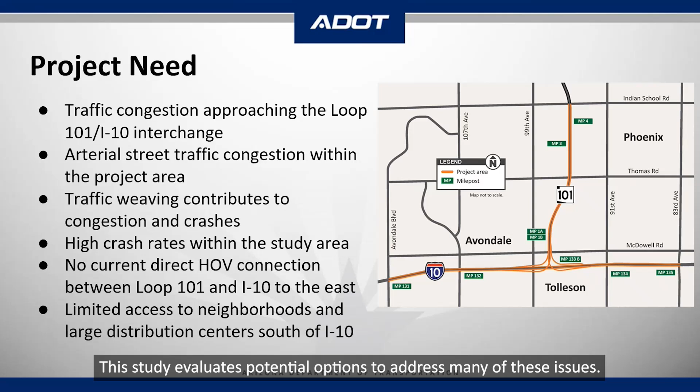Finally, there are several large distribution centers located south of I-10, which generate heavy truck movements, with limited options for access to the freeways and many conflicting movements with vehicles. This study evaluates potential options to address many of these issues.

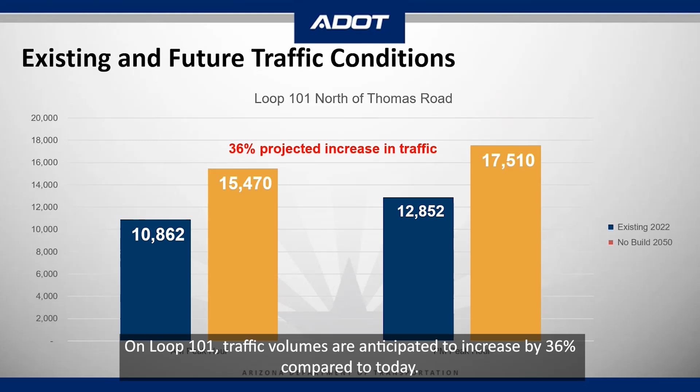With additional growth in the West Valley, it is anticipated that traffic levels will continue to increase, which would further increase congestion on I-10, Loop 101, and the surrounding areas. The study team is evaluating both the existing traffic conditions and the future traffic conditions up to the year 2050 within the study area. On Loop 101, traffic volumes are anticipated to increase by 36% compared to today.

On I-10, traffic volumes are anticipated to increase by 19% compared to today. These increases in traffic volumes during the peak travel periods will contribute to increased congestion on both Loop 101 and I-10.

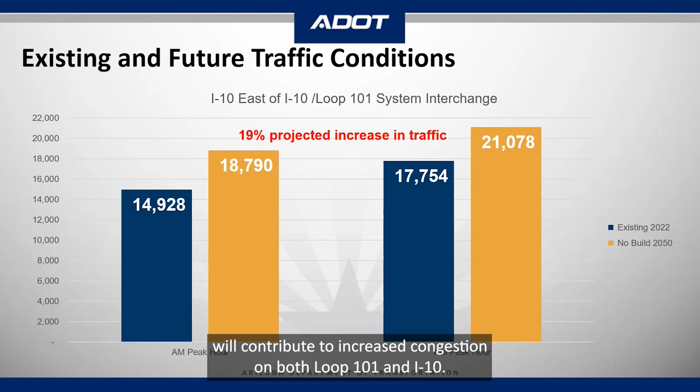The project area is currently experiencing moderate to high levels of congestion during the morning commute. The areas shown in red indicate high levels of congestion, and yellow indicates moderate congestion. Although some of the intersections show overall moderate levels of congestion, there are many movements experiencing high congestion.

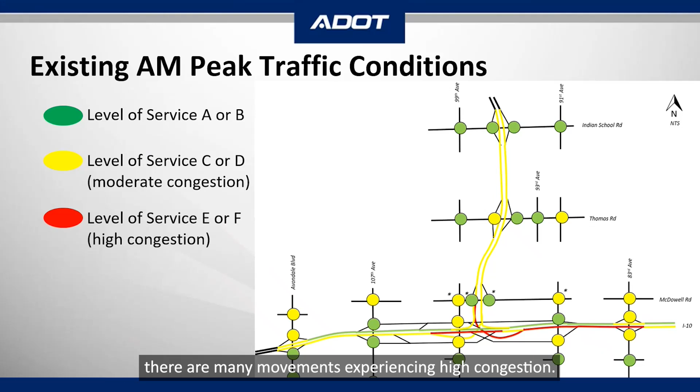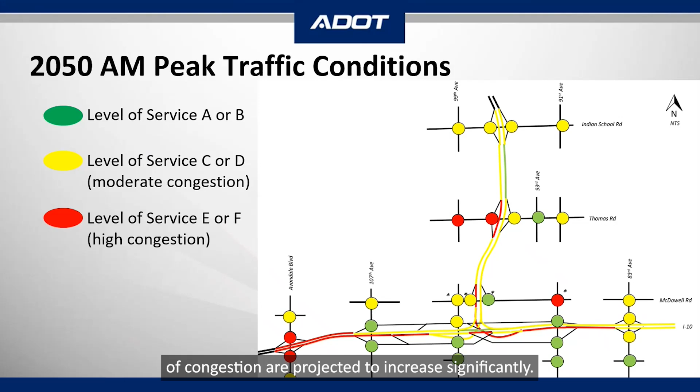As we look into the future, by 2050, the congestion in the AM peak travel period will continue to increase. As you can see here, areas with a high level of congestion are projected to increase significantly.

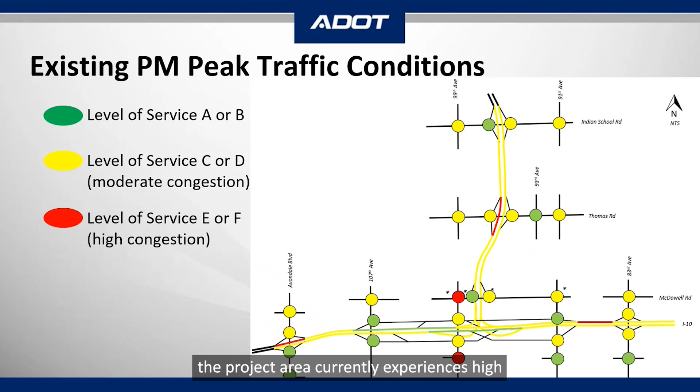During the evening commute, the project area currently experiences high and moderate levels of congestion. The 2050 PM peak travel period shows even more congestion, particularly on Loop 101 in the southbound direction. This can be directly attributed to the high number of weaving movements required for vehicles to navigate to the Loop 101 and I-10 system interchange ramps.

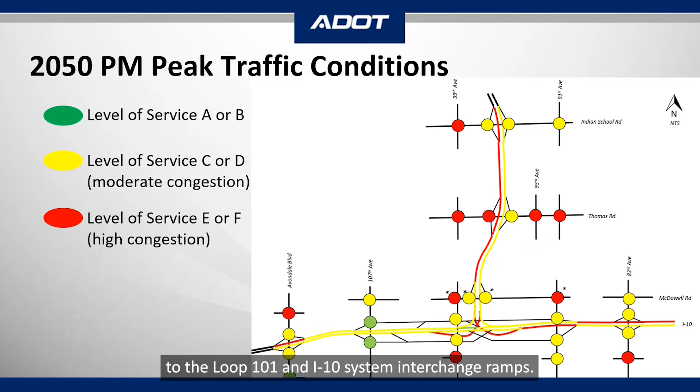To address the area-wide needs and increasing level of congestion, the purpose of this study is to mitigate weaving movements for HOV traffic along Loop 101 and I-10 east of the system interchange by providing a direct HOV ramp connection. Improve safety by minimizing traffic conflict points associated with the numerous weaving movements.

Improve mainline traffic operations on I-10 and Loop 101. Improve operations at the traffic interchanges and surface streets. Accommodate future widening projects along mainline and adjacent projects. And provide opportunities for incident management by improving access.

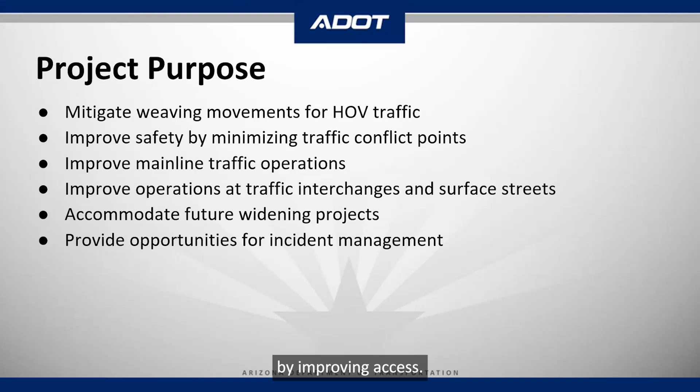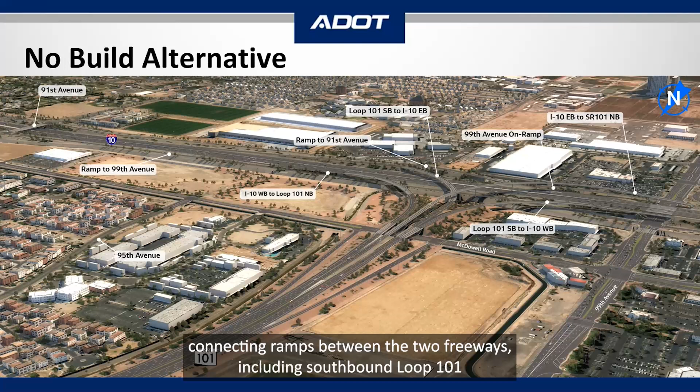The existing Loop 101 and I-10 interchange currently provides 4 direct connecting ramps between the two freeways, including southbound Loop 101 to eastbound I-10, southbound Loop 101 to westbound I-10, eastbound I-10 to northbound Loop 101, and westbound I-10 to northbound Loop 101. Within the system interchange area, there is also an eastbound I-10 exit ramp to 91st Avenue.

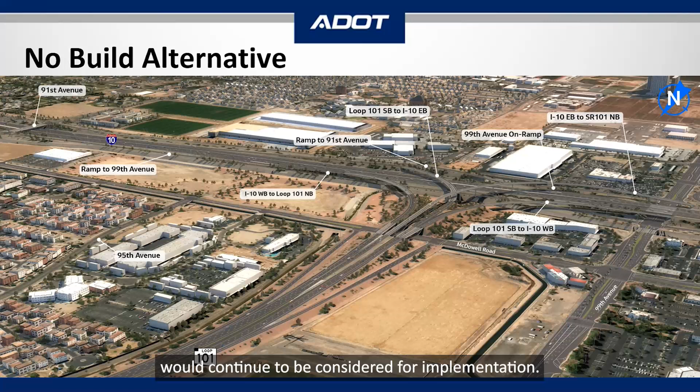One of the options considered with this study is the no-build alternative. This assumes that none of the improvements identified in this study would be implemented, and the traffic conditions described earlier would continue to worsen over time. Other planned and programmed projects in the area not associated with this study would continue to be considered for implementation.

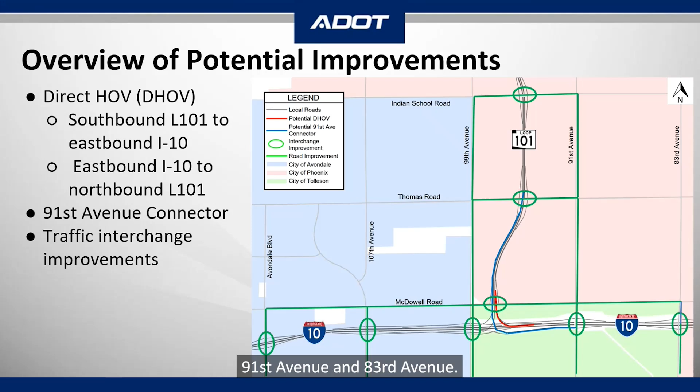To mitigate some of the existing and future congestion within the project area, several improvements are under consideration. These include a direct HOV connection for Loop 101 traffic to and from the north and I-10 to and from the east, a connection between southbound Loop 101 to 91st Avenue, possible interchange improvements to improve traffic flow on I-10 at Avondale Boulevard, 107th Avenue, 99th Avenue, 91st Avenue, and 83rd Avenue, and on the Loop 101 at McDowell Road, Thomas Road, and Indian School Road.

As presented during the October 2022 public information meeting, 6 DHOV ramp alternatives were developed, alternatives A through F. Since that time, the study team has completed a comprehensive comparative analysis of each alternative. After this evaluation, 2 alternatives remain as options for implementation.

Alternative B would remove and reconstruct the existing I-10 eastbound to northbound Loop 101 ramp, which would provide room within the Loop 101 median. The new I-10 to Loop 101 ramp would be moved toward the east and would continue to be the highest level bridge in the interchange. The new DHOV ramp would be added within the medians of Loop 101 and I-10 and would be at the same level as the existing south to east ramp.

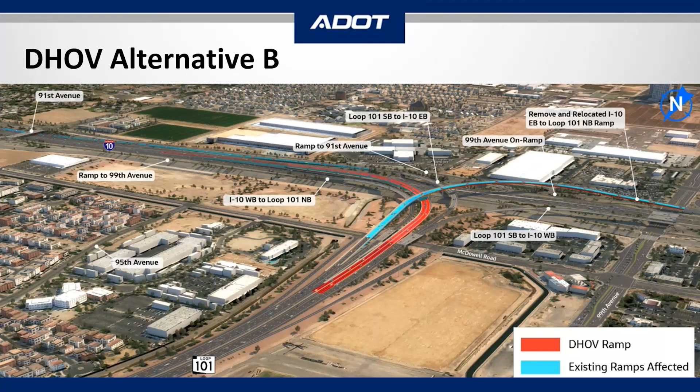Some of the advantages of Alternative B are that it accommodates all traffic movements during construction, and traffic entering from Thomas Road may be able to use the DHOV lanes, but multiple lane changes would be required. Some of the challenges associated with this alternative are that it would require removal of the existing eastbound I-10 to northbound Loop 101 ramp and construction of a new east to north ramp. The removal of the existing bridge and construction of the new bridge would require short-term closures due to construction activity above both directions of I-10.

The new eastbound I-10 to northbound Loop ramp would be shifted slightly closer to adjacent properties. Slightly higher utility and/or right-of-way impacts could be encountered along the south side of I-10, and the DHOV speed limit would need to be lower than desirable due to the sharper curve on the ramp. The study team's initial recommendation is that this alternative be presented for consideration and feedback by the public and various local agencies.

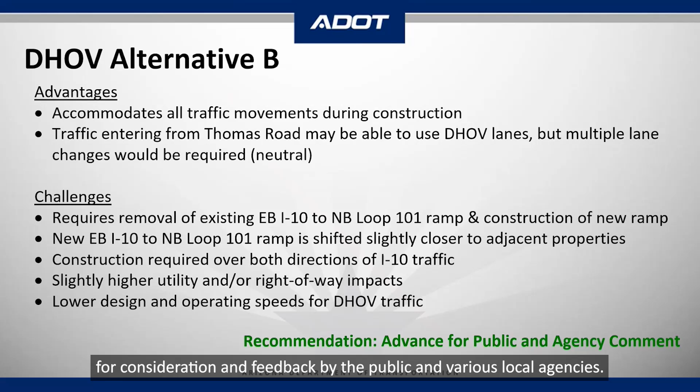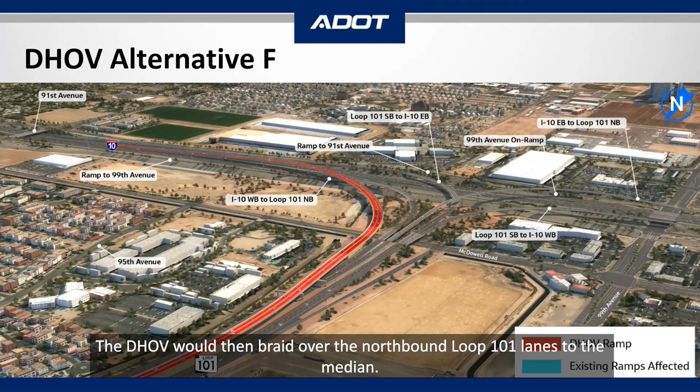Alternative F would not require moving or reconstructing any of the existing Loop 101 I-10 ramps. The DHOV ramp would braid from the median over the I-10 westbound lanes and be located on the northeast side of the system interchange. The DHOV would then braid over the northbound Loop 101 lanes to the median. The DHOV improvements would extend further north on Loop 101 due to the braided structure.

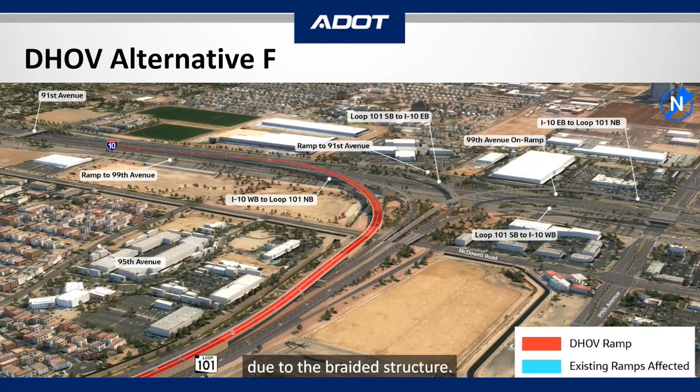Some of the advantages of Alternative F are that it does not impact any of the existing system interchange ramps, and there would be adequate room for future maintenance of the DHOV ramp. It would require minimal traffic control during construction, since most construction is away from I-10 and Loop 101 traffic. Alternative F has minimal utility and/or right-of-way impacts and would provide a higher posted speed and lower construction costs than Alternative B. One challenge would be that the DHOV ramp would be closer to adjacent properties, but would remain within ADOT-owned property.

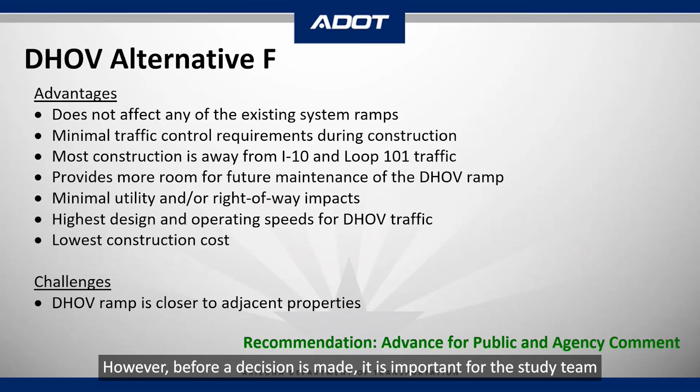When comparing Alternative F to Alternative B, it appears that DHOV Alternative F would better meet the needs and purpose of the project. However, before a decision is made, it is important for the study team to hear from the agency stakeholders and the public.

As discussed earlier in this presentation and mentioned during the October 2022 public information meeting, a potential connection from southbound Loop 101 to 91st Avenue is also being considered. 3 alternatives were identified and are being evaluated with this study.

Alternative 1 would provide a 1-lane exit ramp from southbound Loop 101 to 91st Avenue just north of the Thomas Road Bridge, which would braid over the Thomas Road southbound entrance ramp, continue along the west side of Loop 101, braid over the McDowell Road southbound exit ramp, then fly over the system interchange and connect to the I-10 to 91st Avenue eastbound exit ramp. With Alternative 1, McDowell Road southbound exit ramp remains in its current location.

Some of the advantages of Alternative 1 are that it would not relocate the southbound Loop 101 to McDowell Road exit. There would be slightly lower utility and right-of-way impacts when compared to the other alternatives. Challenges with Alternative 1 are that it does not improve traffic operational performance on southbound Loop 101, and traffic exiting to McDowell Road could potentially back up into the Loop 101 lanes. The high weaving movement between the southbound traffic entering from Thomas Road and traffic exiting at McDowell Road would remain in place, which contributes to traffic congestion on Loop 101.

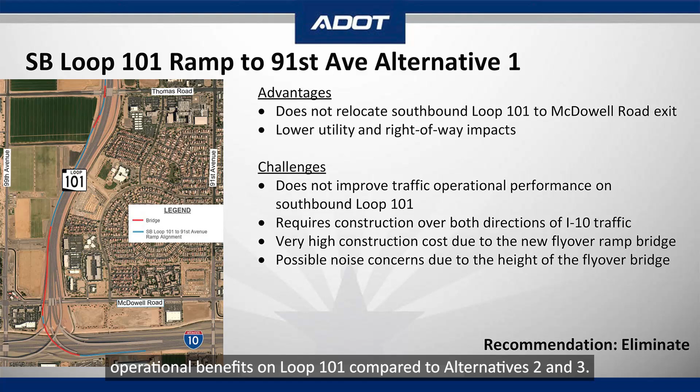This alternative would require construction of a new flyover bridge over both directions of I-10 traffic, and it has a very high construction cost. Although not anticipated to be a concern, there could be possible noise concerns due to the height of the flyover bridge. The project team has reviewed this alternative and recommends that it be eliminated, since it does not result in traffic operational benefits on Loop 101 compared to alternatives 2 and 3.

Alternative 2 would provide a 2-lane combined exit ramp from Loop 101 to McDowell Road and 91st Avenue. The exit would begin just north of the Thomas Road Bridge, then braid over the Thomas Road southbound entrance ramp, and continue along the west side of Loop 101. One of the ramp lanes would exit to McDowell Road, and the second lane would continue toward 91st Avenue and include a 1-lane bridge that would fly over the system interchange and connect to the existing I-10 to 91st Avenue eastbound exit ramp.

With Alternative 2, the McDowell Road southbound exit ramp is relocated further north and combined with the 91st Avenue exit north of the Thomas Road Bridge. Some of the advantages of Alternative 2 are that it would improve traffic operational performance on southbound Loop 101 by eliminating the weaving movement between southbound traffic entering from Thomas Road and traffic exiting at McDowell Road, and it reduces the risk of traffic exiting at McDowell Road and backing up

into the 101 lanes. Challenges associated with Alternative 2 are that it would require construction of a new flyover bridge over both directions of I-10 traffic, and it has a very high construction cost. Although not anticipated to be a concern, there could be possible noise concerns due to the height of the flyover bridge, and it would have slightly higher utility and right-of-way impacts when compared to alternatives 1 and 3. The study team recommends that Alternative 2 be presented for consideration and feedback by the public and various local agencies.

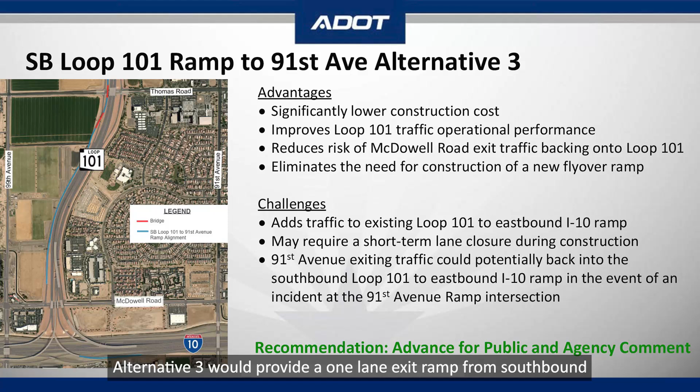Alternative 3 would provide a one-lane exit ramp from southbound Loop 101 to McDowell Road just north of the Thomas Road Bridge, then would braid over the Thomas Road southbound entrance ramp, continue along the west side of Loop 101, and terminate at McDowell Road. From the end of the existing ramp from southbound Loop 101 to eastbound I-10, a slip ramp would be added that would provide an exit that connects to the existing I-10 eastbound to 91st Avenue exit ramp.

Some of the advantages of Alternative 3 are that it would be significantly lower construction costs since a new flyover bridge would not be needed, and it eliminates the need for construction of a new flyover ramp. It would also improve Loop 101 traffic operational performance by eliminating the weaving movement between southbound entering traffic from Thomas Road and traffic exiting at McDowell Road, and it reduces the risk of McDowell Road exit traffic backing onto Loop 101.

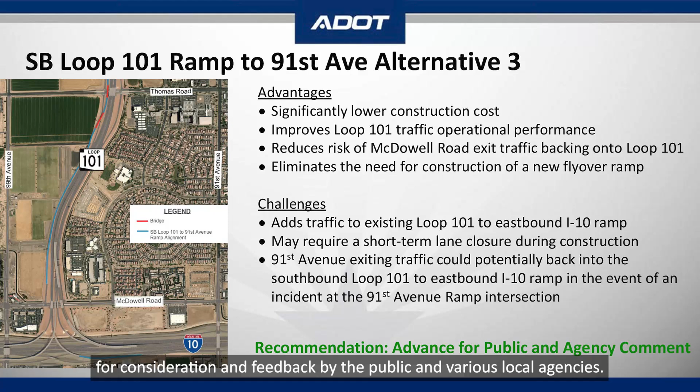Some of the challenges are that it adds traffic to the existing Loop 101 to eastbound I-10 ramp, but it will continue to operate at an acceptable level of service. During construction, a short-term lane closure on the southbound Loop 101 to eastbound I-10 ramp may be required. 91st Avenue exiting traffic could potentially back into the southbound Loop 101 to eastbound I-10 ramp in the event of an incident at the 91st Avenue ramp intersection. The study team recommends that this alternative be presented for consideration and feedback by the public and various local agencies.

A comprehensive traffic analysis was completed for the entire study area. Traffic flow at several of the interchanges along I-10 and Loop 101 could be improved by either adding additional lanes or with changes to signal timing and phasing, resulting in less congestion in 2050.

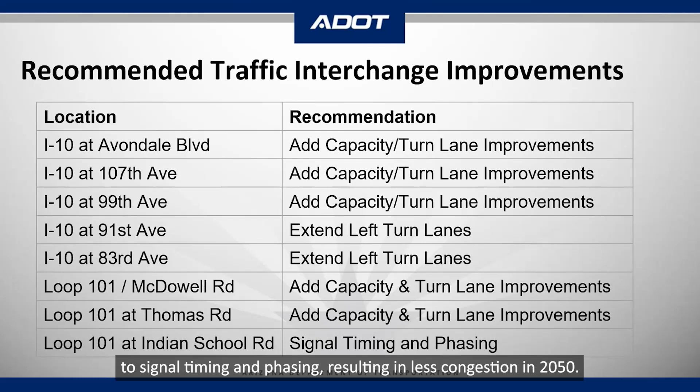The study team is completing evaluation of the environmental conditions in compliance with the environmental regulations such as the National Environmental Policy Act and the Clean Air Act. This process will document potential impacts to social, economic, and natural environments, including socioeconomic, air quality, land use, noise, biology, publicly owned parks, trails, wildlife refuges, and historical sites, cultural resources, historic properties, hazardous materials. The team will document public and agency outreach for the project record. A noise analysis is underway, and once finalized, it will be available on the ADOT webpage.

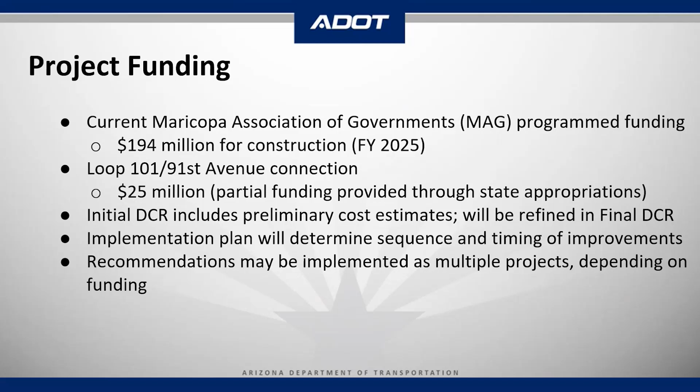There is approximately $194 million identified for the I-10 and Loop 101 system interchange in fiscal year 2025 in the Regional Transportation Improvement Program, which is overseen by the Maricopa Association of Governments, regional planning organization for freeways and other transportation facilities in the region. The Arizona State Legislature also appropriated approximately $25 million, which would provide partial funding for the potential Loop 101 to 91st Avenue connection. The project costs will be refined as part of the current study, and an implementation plan will identify a series of improvement projects that could be implemented over time.

There are several different ways you can comment or ask questions about the project. By filling out a comment form at the public open house or through the online comment form at azdot.gov/I-10loop101-commentform. Contacting Kim Larson at KLARSON@azdot.gov or calling her at 480-589-4366. You can also mail your comments to Kimberly Larson, ADOT Community Relations, 1655 West Jackson Street, room 179, MD 126F, Phoenix, Arizona 85007.